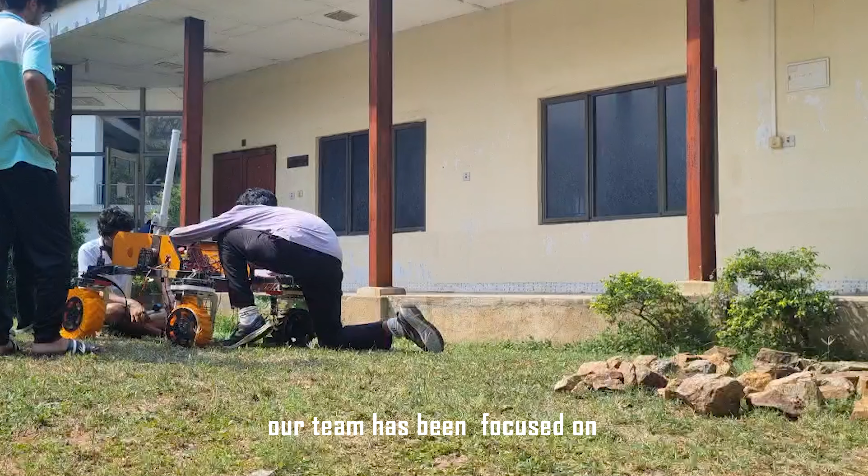Since April 2020, our team has been focused on exploring and accumulating scientific and technological knowledge in space and robotic technologies by developing unique viewpoints and innovative solutions.

To ensure streamlined workflow, our team is structured for both strategic and technical efficiency. At the top, we have a team lead who drives overall mission and strategy, supported by a technical lead for technical direction and system integration. For internal operations, our team is organized into five specialized subsystems: mechanical, electronics, software, science, and management, each guided by dedicated team leads.

Over the past few years, we have been actively participating in many prestigious rover competitions, such as IRC conducted by Aspiros and IROC conducted by ISRO, consistently delivering strong results and improving our overall performance. Building on this foundation, we now aspire to take our next step and represent our country as well as our college at European Rover Challenge 2025.

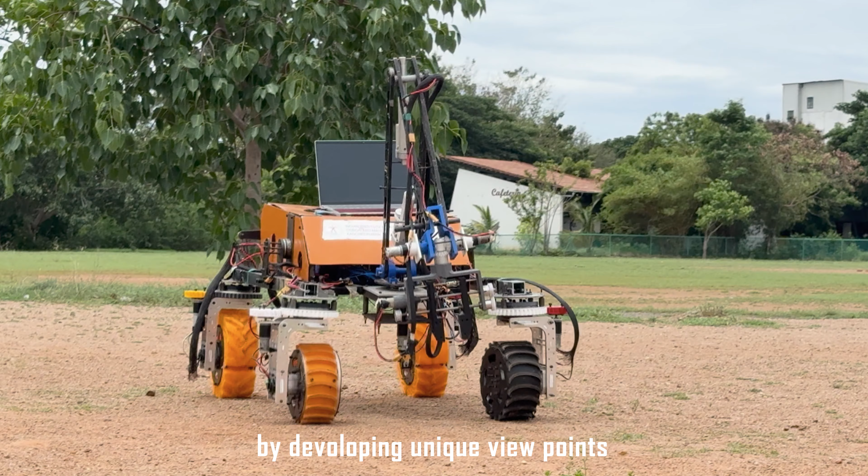In Rover Lakshya, we have implemented four-wheel drive with independent steer. This year, we have made several improvements keeping in mind the failure points seen in our previous designs. The rover mobility system is designed to provide smooth and stable drive over rough and challenging terrain. How do we achieve this?

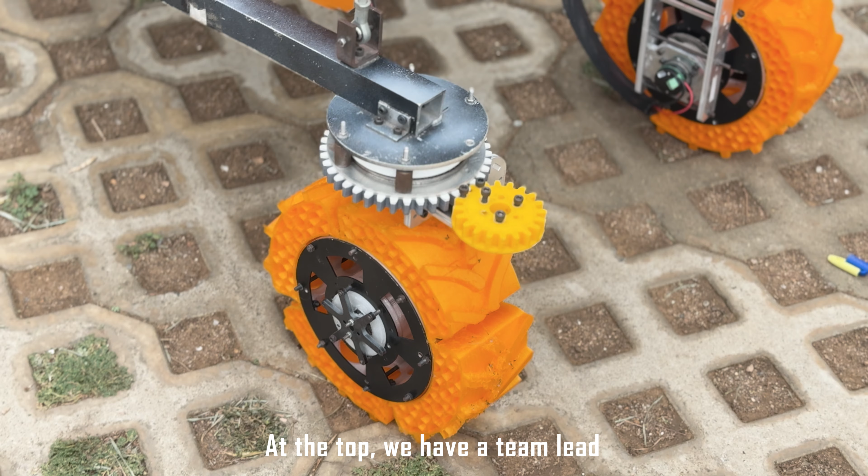Starting from the ground, we have created the wheel using TPU and PETG support for keeping the weight as minimum as possible. We have added an airless wheel design in our wheels, which helps to increase traction, reduce vibration, and it also helps in absorbing impacts, which results in stable drive over challenging terrain.

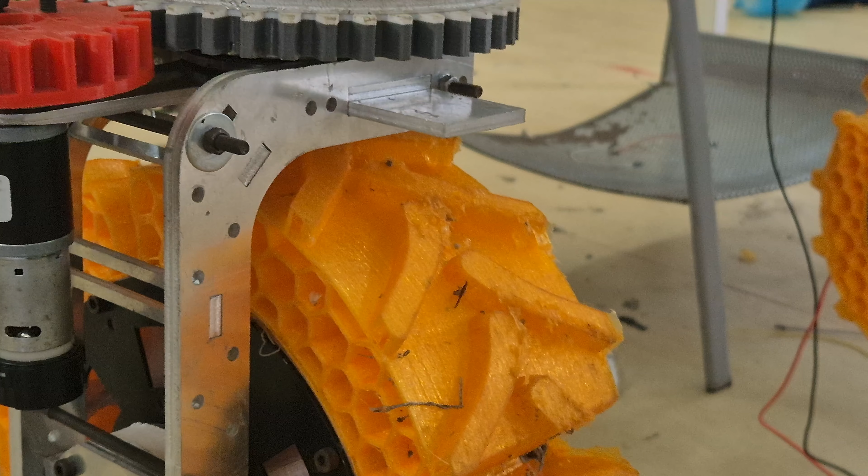We have manufactured lightweight wheel mounts with aluminum material, which provide good strength to weight ratio. The rocker suspension is used to maintain rover stability on uneven ground by distributing the weight equally, while the differential bar helps in maintaining contact with the ground.

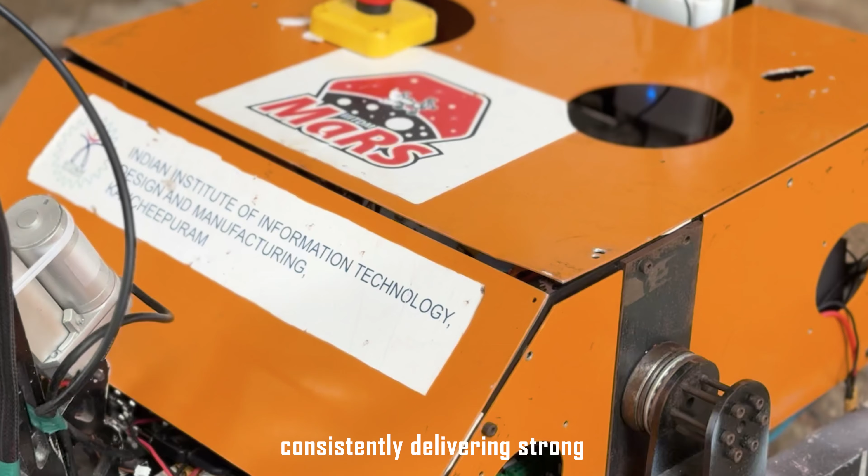20 mm mild steel square pipes are used for the structural frame of the chassis, which enables it to withstand the torque when the manipulator is completely stretched out.

The electronics of the rover deals with power distribution, controls, and communication. The rover uses ESP32 dev kit for its better processing power and multiple built-in communication protocols like Wi-Fi and Bluetooth, an upgrade over the STM32 which we used earlier.

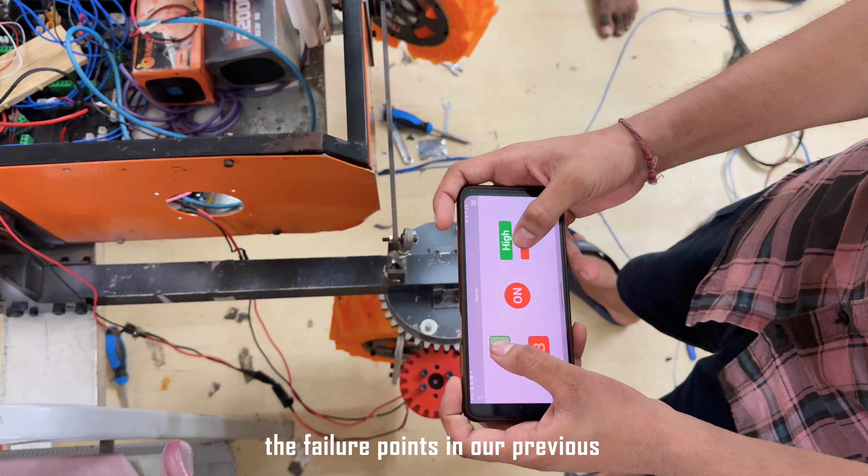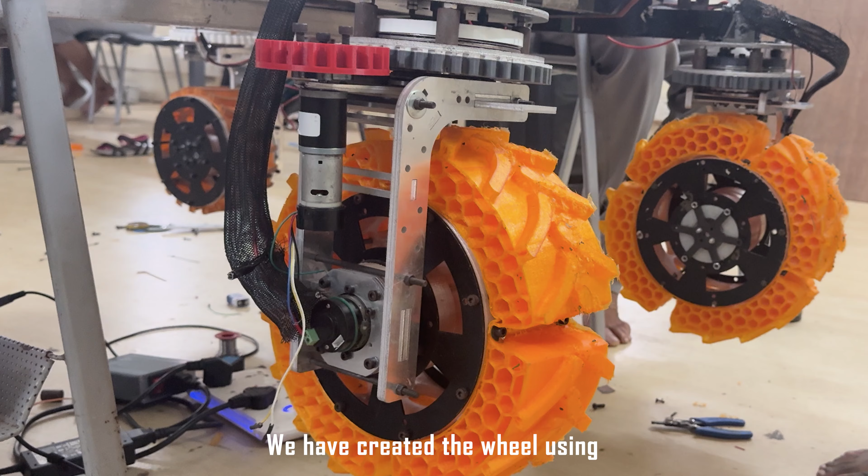ESP32 controls the geared DC motors for drive and steering, which are equipped with encoders to achieve velocity control for drive and position control for steering, using a PID control algorithm. The spot-turn mechanism using four-wheel steer facilitates easy autonomous control while applying less mechanical stress.

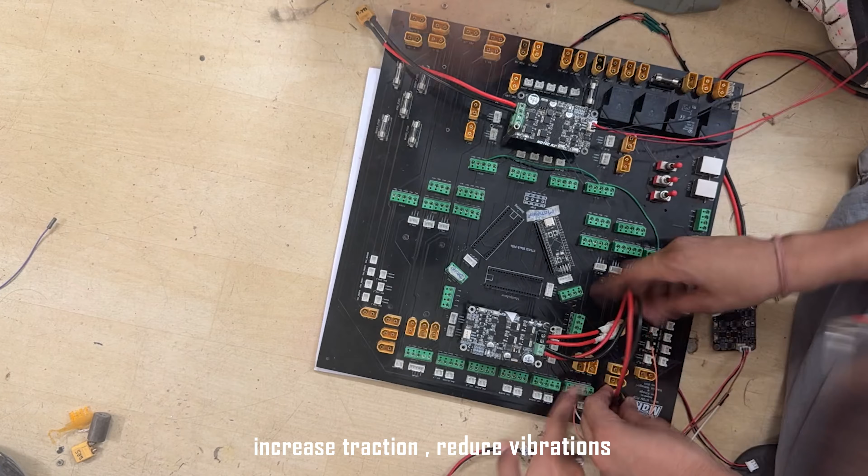The drive and steering mechanisms are powered by an 18-volt supply and a 12-volt supply respectively. The whole rover consumes around 750 watts of power.

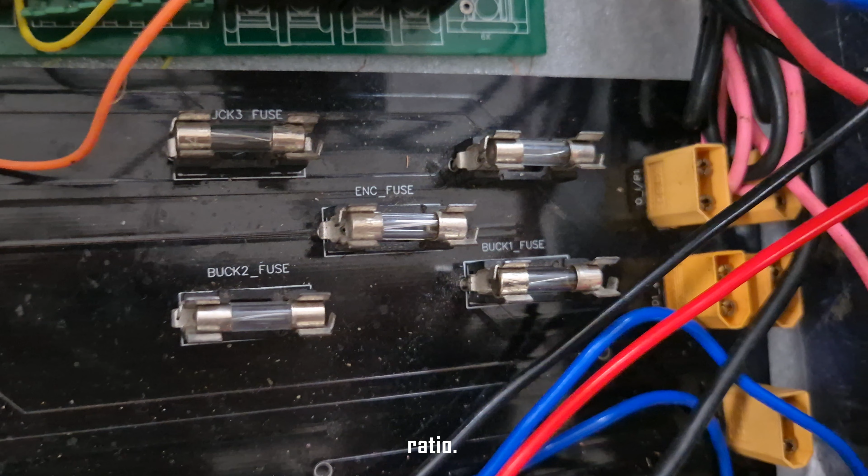Two custom-made PCBs have been developed to distribute power, secure connectivity between components, and ensure modularity. These are fitted with fuses for overcurrent protection and a relay-based kill switch to cut off the rover's power supply under unsuitable conditions.

The omnidirectional Ubiquiti Rocket setup, operating around the 5 GHz band, acts as the rover's primary source of communication because of its high bandwidth.

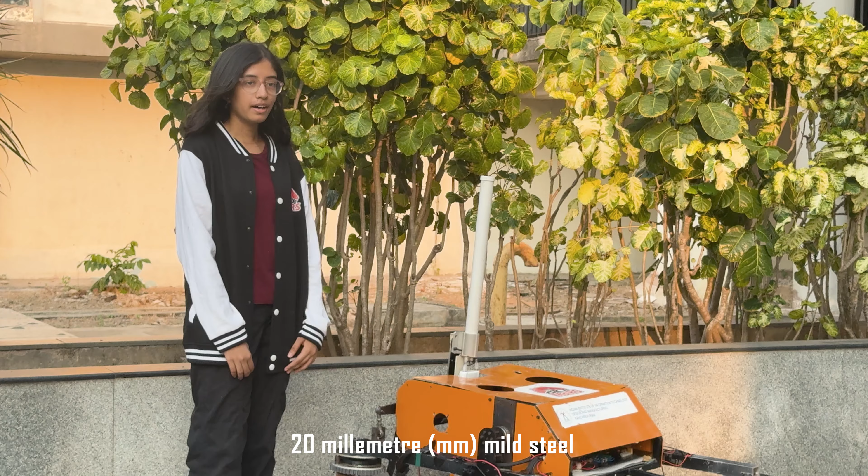If it fails, the secondary communication is the long-range LoRa module, which transfers important information until primary communication is re-established. It can also act as a remote kill switch.

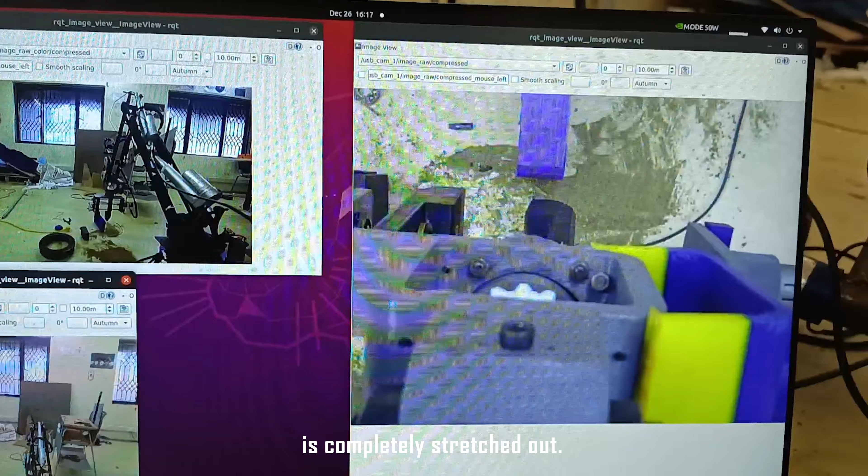We have shifted to ROS to interlink different software capabilities and electronic components. The rover is controlled through a joystick during teleoperation. The control system of the rover receives commands from the onboard computing unit, Jetson Orin, using microROS.

For the rover's mobility, we use a set of core sensors: IMU for orientation, wheel encoder for odometry, and a 2D lidar for scanning the environment. These data streams are then published as topics IMU, ODOM, and SCAN, which are then fused using an extended Kalman filter, which helps us in estimating our rover's course.

For autonomous navigation, we use RTAB-Map to build a real-time map of the environment. This map is integrated into the ROS2 navigation stack, which handles both global and local path planning. The system dynamically updates costmaps, avoids obstacles, and plans efficient routes using planners like DWB or TEB. This entire setup enables the rover to navigate safely and adapt to unknown environments without manual intervention.

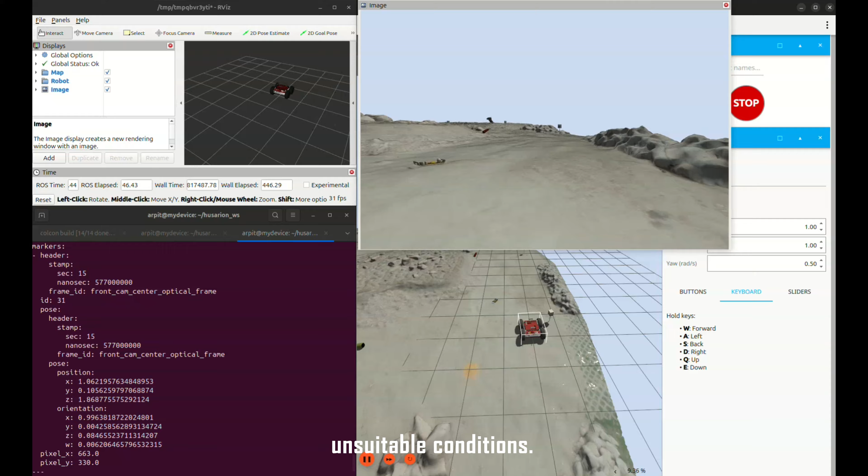Here you can see our rover making its way through the terrain, spotting an ArUco marker ahead. It uses real-time camera data to understand its surroundings and figure out exactly where it is. This visual data directly assists in navigation, manipulation, and task-specific decision-making across both the rover and drone.

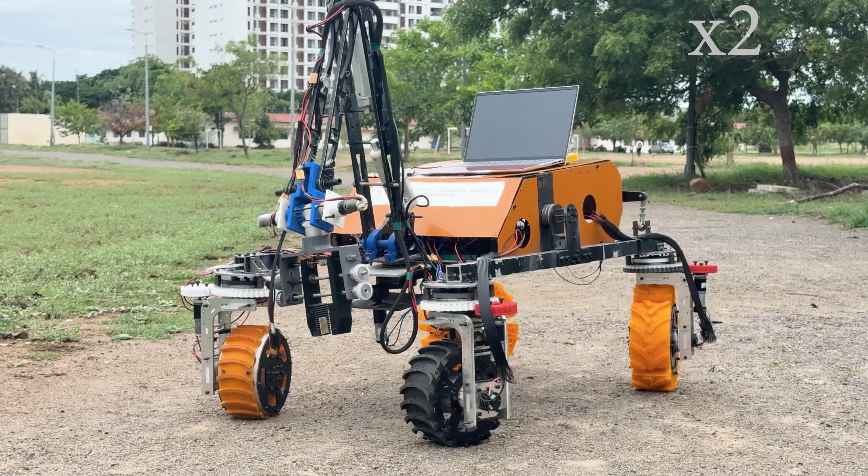Alongside the rover, we have developed an autonomous drone system for aerial tasks. The drone utilizes the PX4 flight stack integrated with ROS2 through MAVROS. This lets us control the drone in both manual and autonomous mode via onboard commands. The above-mentioned things have been successfully implemented in a commercial off-the-shelf drone.

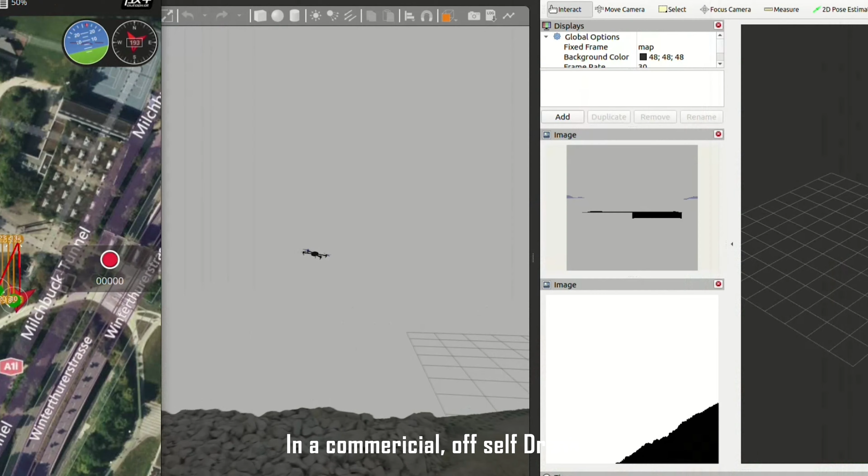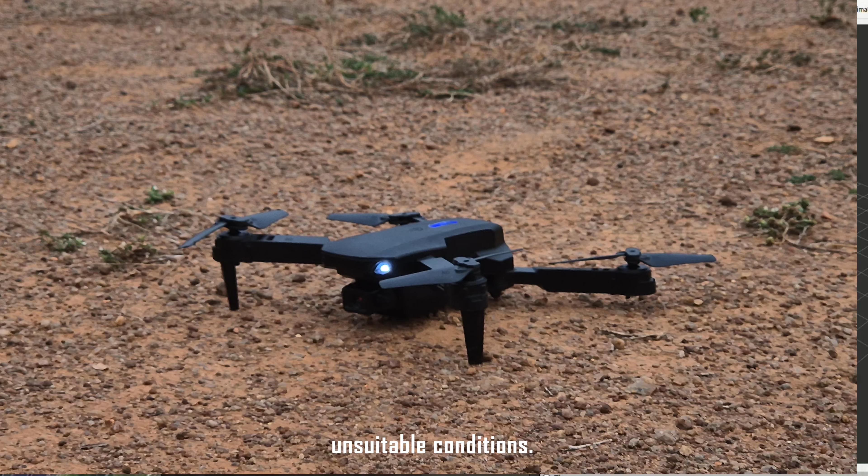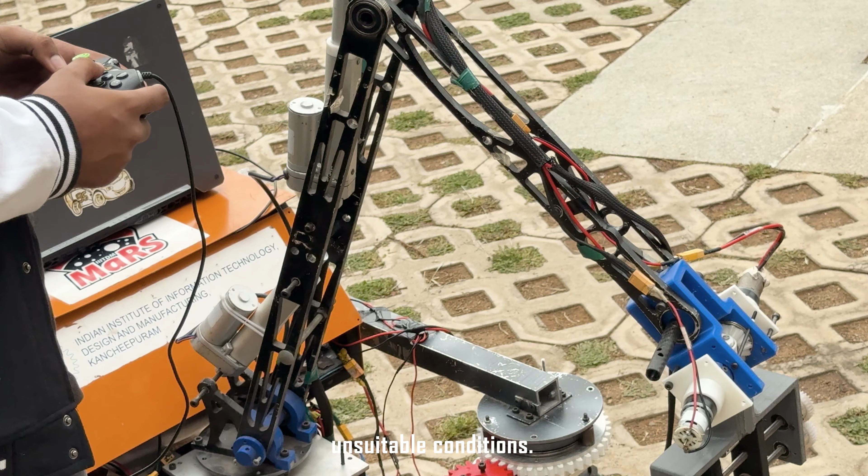For real-time positioning, we rely on onboard IMU and barometer data, along with visual odometry or optional GPS depending on the environment. Using MAVROS topics, we send trajectory waypoints or velocity commands to guide the drone through tasks like aerial mapping or inspection. There are several safety mechanisms like telemetry monitoring, geofencing, and fail-safe triggers built to ensure robust operation during the mission. From the mechanical subsystem, we currently have a 5-degree-of-freedom manipulator.

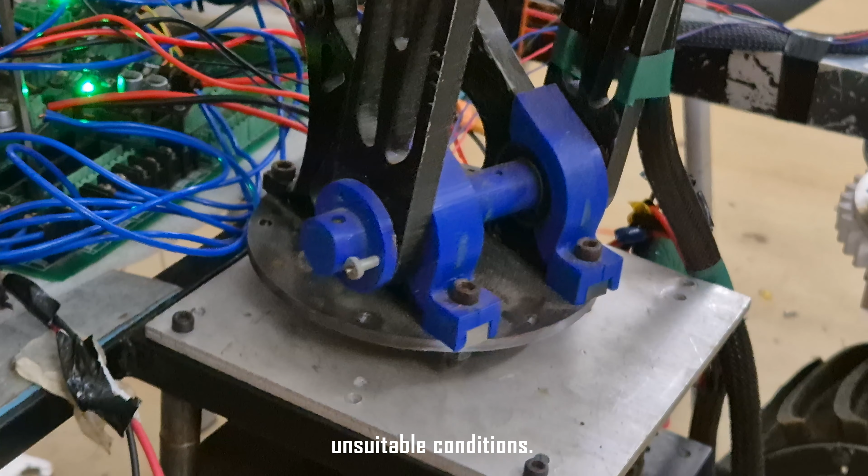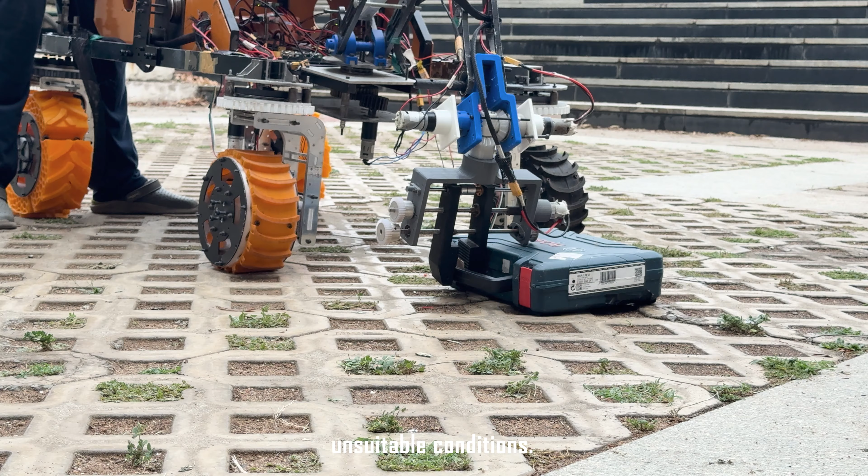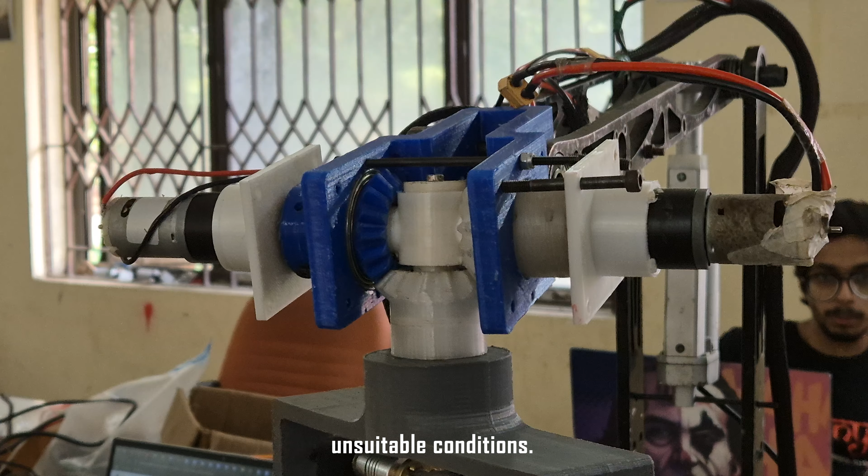For the future, we will be using a cycloidal gearbox at the base link, which outputs very high torque while the space occupied is minimized. For Link 3, we will be implementing the mechanism using a coaxial shaft, which results in high effective torque transmission while being compact.

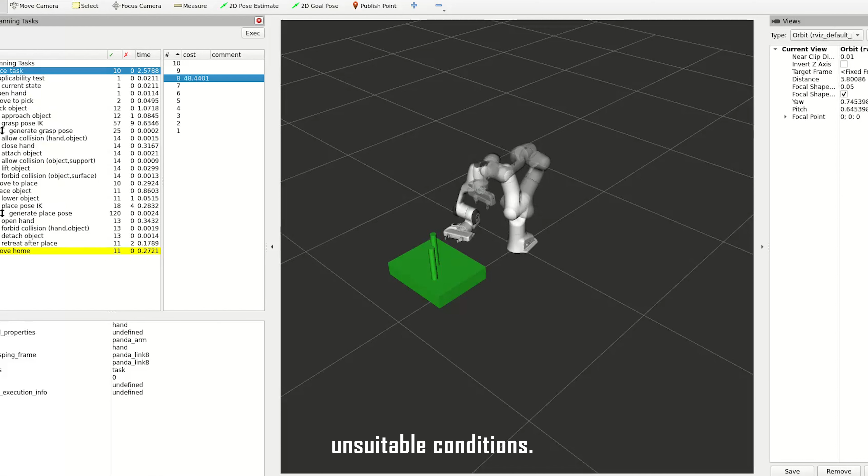To interact with the environment just like our hand, we use a robotic arm mounted on the rover. It's controlled using MoveIt for motion planning, allowing us to perform precise pick and place and various tool operations.

Of our science caching system, we basically have two containers which help in the storage of the rock samples that will be collected, and then we have the manipulator which would help us in obtaining these rock samples, with a clearance of up to 15 centimeters in width.

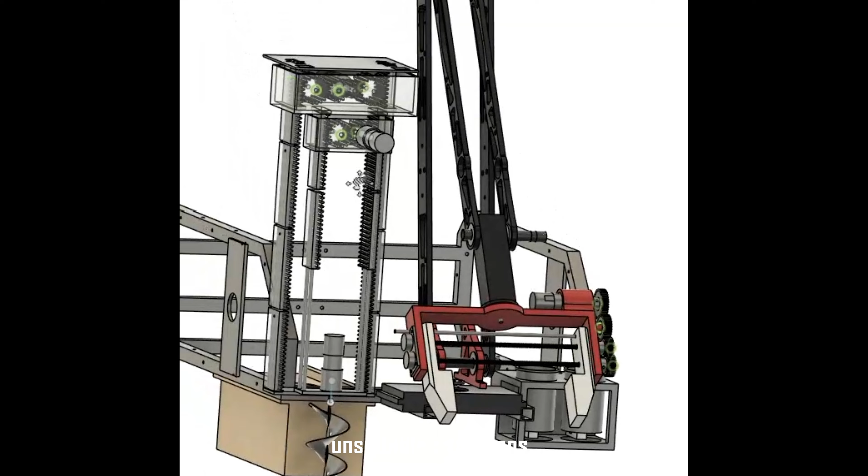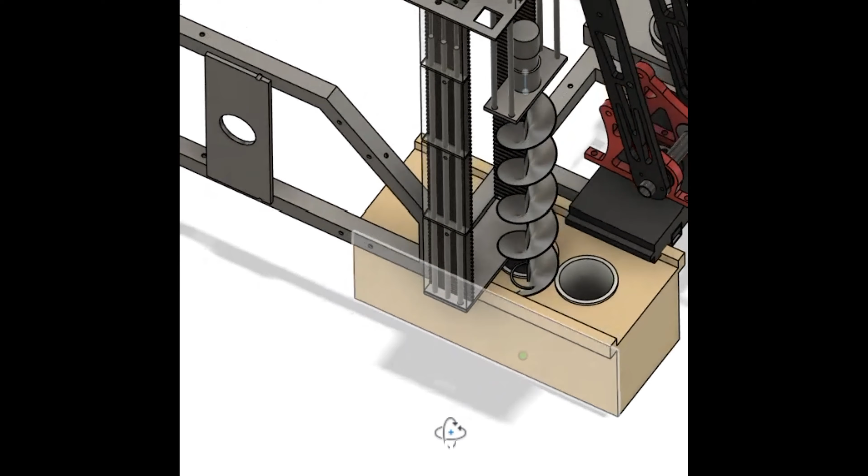Now we have this complex gear system which enables our drill to dig up to 30 centimeters in depth. Next up we have a sliding box mechanism which enables us to collect the soil from the drill after it's been collected. This would mostly be used for the regolith and the deep sample.

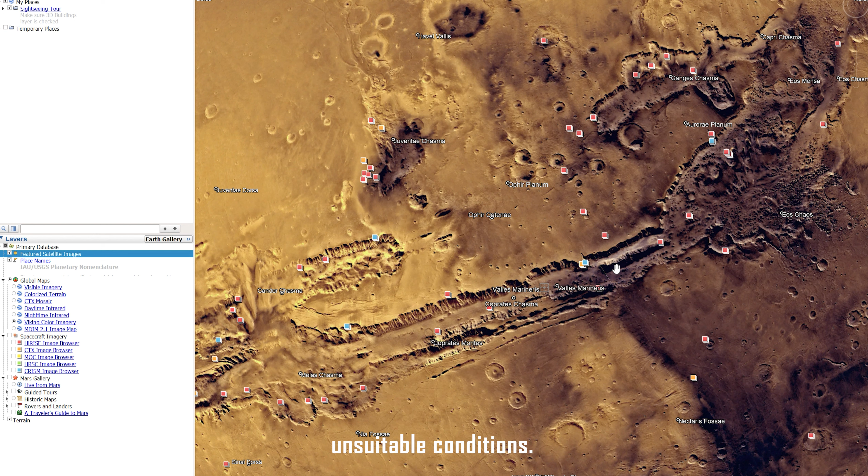Here is the region allotted to us this year, the Valles Marineris. This year our team has opted to go with Google Earth Pro for its needs, as it is easy to use and well suited to our requirements. As per the guidelines, we have access to various layering options of the surface, along with high-resolution HiRISE imagery of the surface. This enables precise site selection and better path planning for our rover.